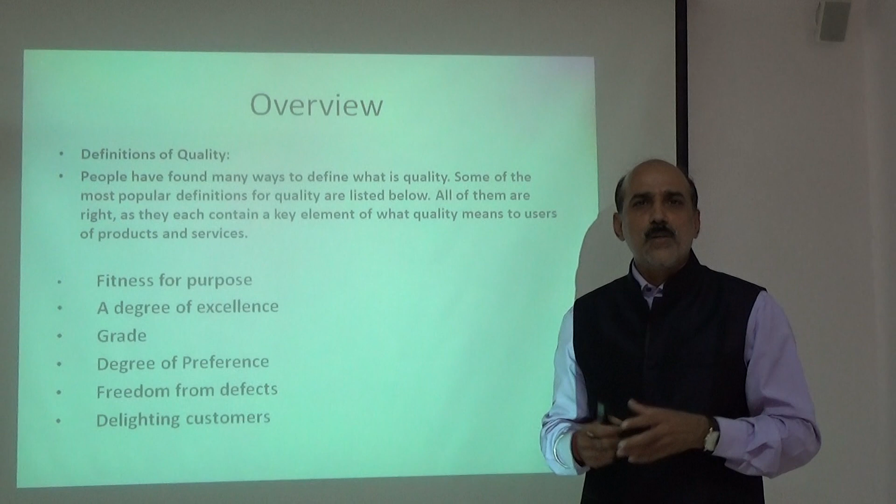If you talk about the reliability of the product, how reliable your product is - as per the definition of reliability, the product should perform its function well without failure. That shows the reliability. If the product confirms this, yes, that product has good quality.

If we talk about the degree of preferences, on the same line as degree of excellence, it is a competitive age. If you want to purchase any one product, there are hundreds of different alternatives available in the market. So it is your choice how you are preferring, how the customers are preferring the product. A simple example related to the automobile sector.

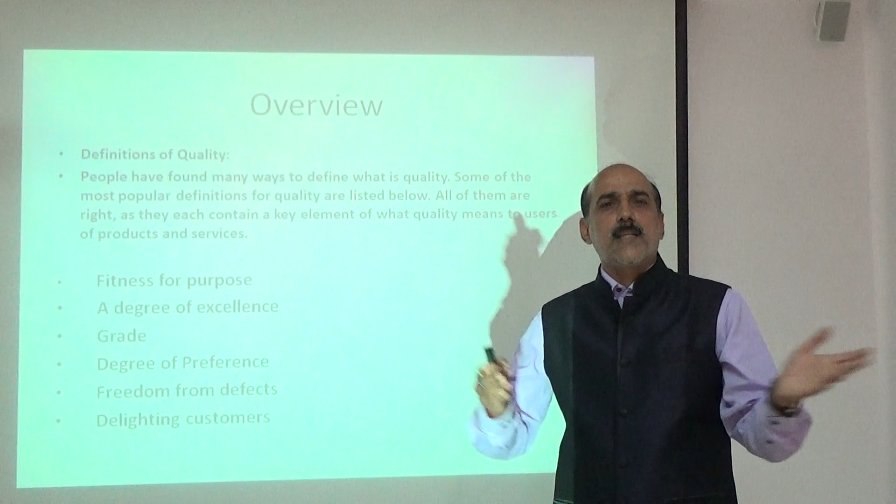Maruti Suzuki is one brand, Hyundai is another brand. In one particular segment, the cost is around 5 lakh rupees. You have multiple choices - either go for the Maruti Suzuki or go for the Hyundai i10, something like that. So it's how you are preferring the product as compared to the products available in the market.

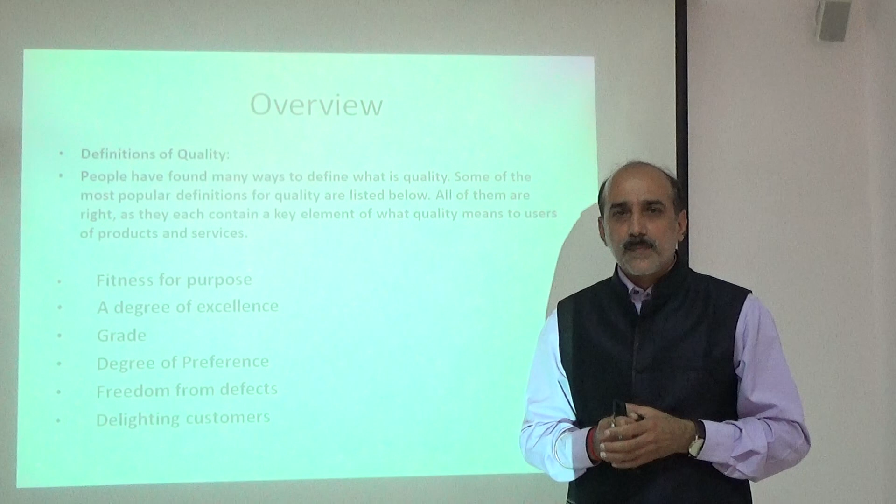If we talk about freedom from defects, that is the simple concept of quality control - 100% productivity, 100% quality product means 0% defect in the product. If the manufacturer ensures that the product is 0% defective, then you can say it is a good quality product. Another one is delighting customers.

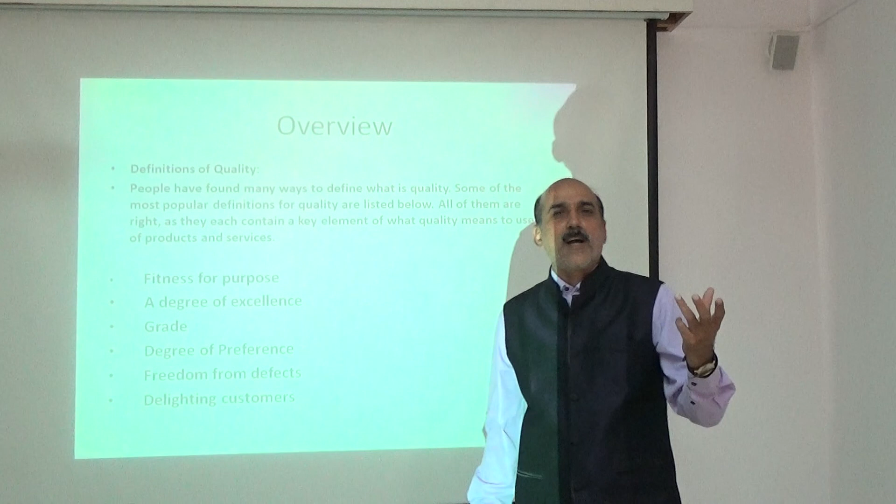The ultimate aim of any production organization, whether manufacturing products or providing services, is toward customer satisfaction. And you know, dil mange more - customers are never satisfied, my dear friends. So it is a bigger challenge to organizations and industries to give satisfaction to the customer. Up to what level will you satisfy the customer?

It totally depends on the cost of the quality - that is another concept being evolved. At the cost of what? A simple example: how are you ensuring that you are manufacturing good quality products? For that you first have to see the quality characteristics. There are lakhs of components being manufactured by thousands of different industries, and every product has been made for a specific application.

I have this simple pen and everybody is using it. As per the first definition, fitness for purpose, what is the purpose of this pen? To write on paper. If I am unable to write on paper using this simple product, then it is not a product, it is like scrap, it is wastage. Even if the body is made of gold with a diamond tip, if the basic functionality is missing, then it is not a product, if it is not fit for the purpose it is meant for.

So friends, we have to understand so many definitions. First we have to see what quality characteristics are expected by the product from the customers.

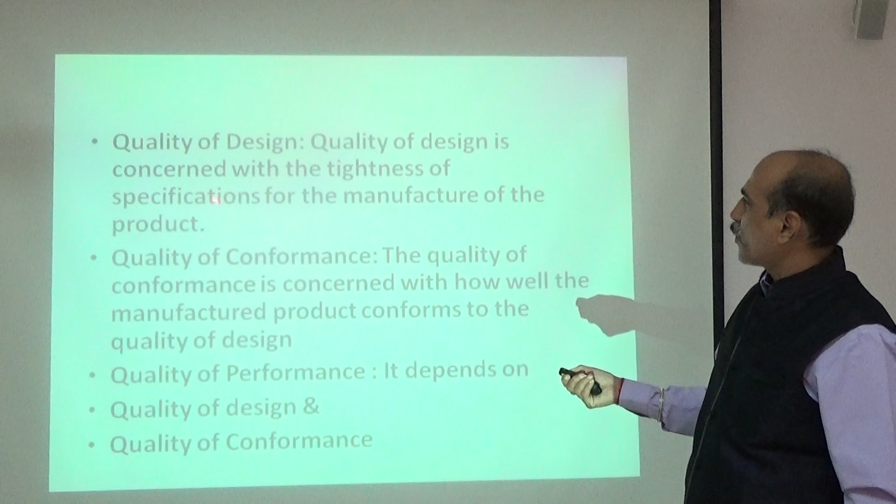On the same line, the first point is quality of design. Quality of design means it is related to the tightness of specifications. Quality of design is concerned with the tightness of specification for the manufacture of the product, and it is associated with cost.

A simple example, from a mechanical engineering point of view, we are manufacturing a gear. The specific use of that gear is extraction of juice from sugar cane. If the purpose is to extract juice from sugar cane, we are not expecting good tightness of tolerances. But the same gear can be used in the gearbox of an automobile, where the expectations are different. There we look for tightness of specification in terms of plus minus 0.005 mm.

So friends, this is what quality of design means. Looking for the tightness of specification, degree of excellence, degree of preference you have to achieve, you have to focus on quality of design, and it is associated with the cost of the component. Second is quality of conformance.

It is how the manufacturer conforms to the quality of design. Quality of conformance is concerned with how well the manufactured product conforms to the quality of design. So these two points, quality of design and quality of conformance, play a crucial role in quality control. I would like to share one more thing about this.

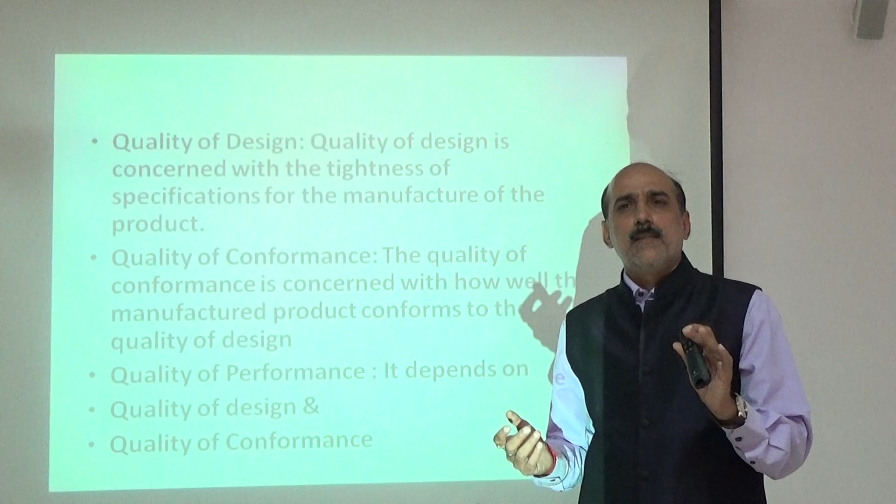What are the quality characteristics? There are some physical quality characteristics, measurable in terms of mm, dimensions, some measurable units. I can weigh this particular pointer in terms of weight. And if we can manufacture this pointer having a very light weight, we can say it is having good quality.

Because I have to keep it in my hand for more than 1 or 2 hours, it should be easy to operate. That's why the design of this pointer is ergonomically designed, so the operator can feel comfortable holding this product. This is a very simple example that I would like to put here.

Some quality characteristics are measurable using mechanical measuring instruments and gauges. But some quality characteristics are not measurable by means of mechanical measuring instruments and gauges.

I just asked you one question: how do you say the quality of half a cup of tea? How can you measure that? There is no exact measuring instrument or gauge to measure the quality of half a cup of tea. How can you say the quality of food? Again, there is no measuring instrument or gauge to measure that quality characteristic, but it is equally important.

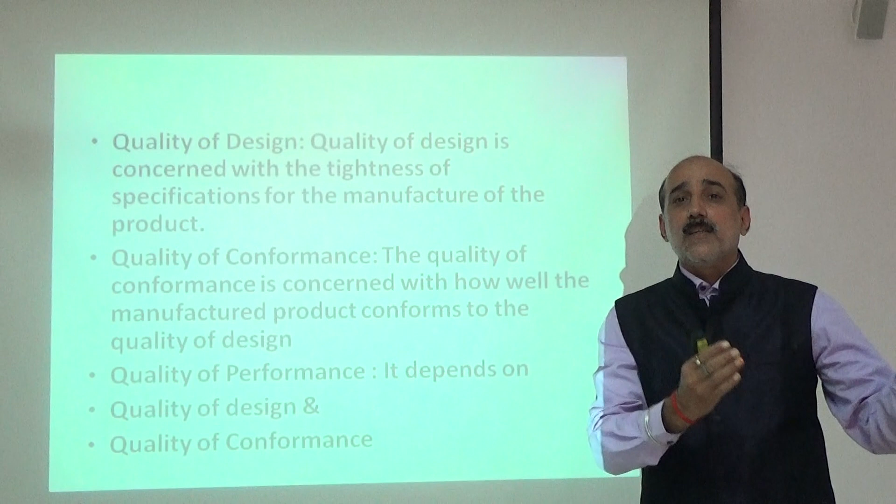If we talk about not only products, we have to consider services also. Because quality control plays the most important role, not only in manufacturing the product, but right from purchase of raw material to dispatch of the finished product to customers, before production and after production. Some quality characteristics are measurable, some are not measurable, that is clear to you.

Next, if we talk about the service industry, this is a simple example from the teaching industry. How can you measure the quality of students in terms of numbers, in terms of grades? But what about the attitude, what about the communication skill, how can you measure this?

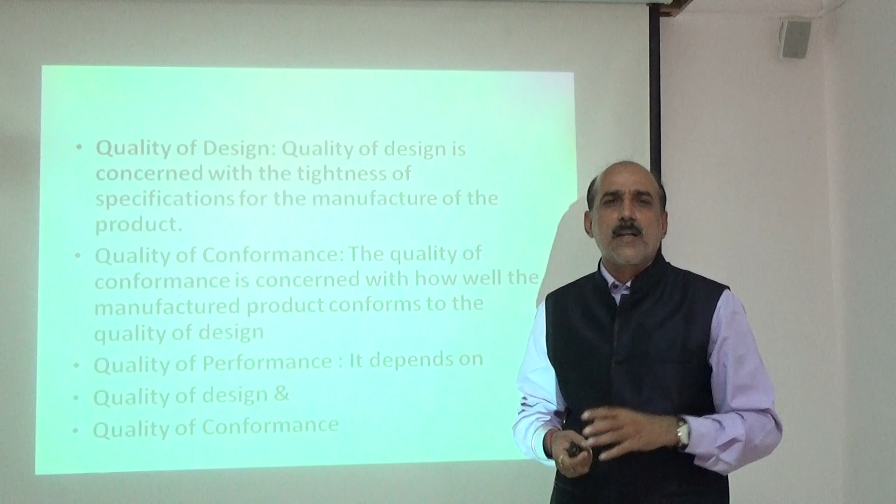On the same line, if you talk about the service sector like the banking sector, how can you measure the quality or grade the quality of nationalized banks, public sector and private sector banking? How can you measure the quality of hospitals, the quality of restaurants, how can you compare the service provided by airlines, like comparing Jet Airways with Air India?

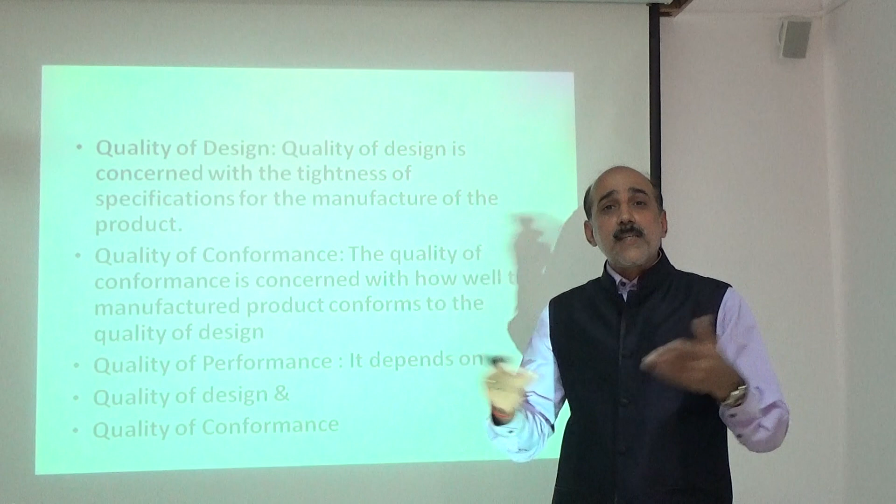So my dear friends, it is a very complex phenomenon to understand quality, and there is always some variation. I assume you understand what exactly quality is, but there are hundreds of different definitions of quality.

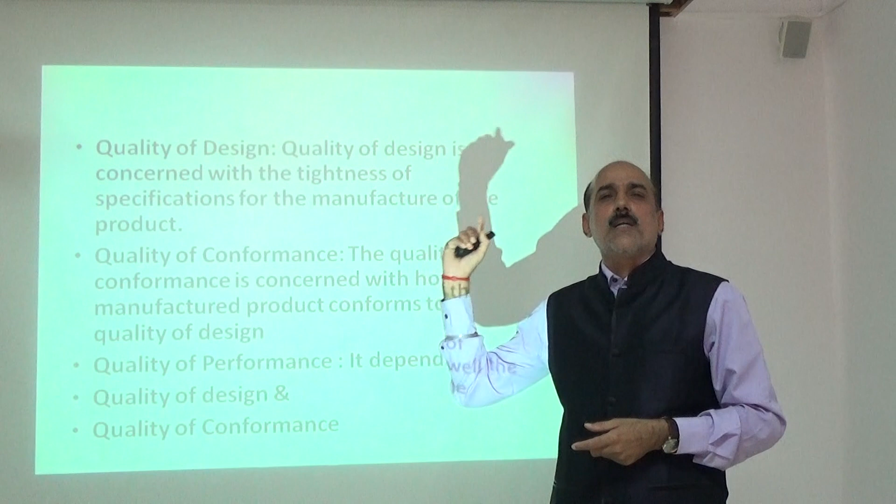Even we are trying to define it with the help of a few words that I already quoted in the earlier slide. We talk about quality of design, tightness of specification, quality of conformance in terms of how you are conforming to the quality of design, and the most important factor, quality of performance, which depends on the earlier two.

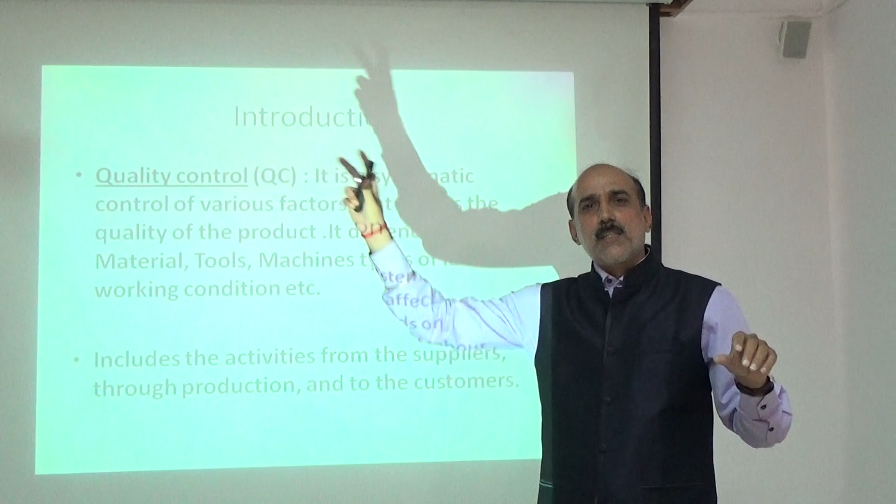If we talk about control, as you know, there are two words in quality control. One is quality - we understand what that is. Second is control - what is meant by the term control? How will you make good quality components and maintain control on all the parameters in the organization, whether it's a production industry or a service industry.

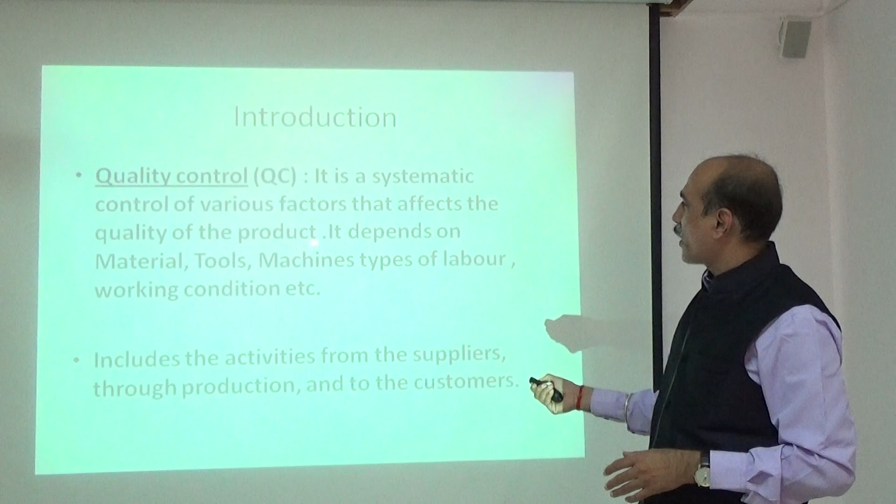Quality control means what? It is a systematic control of various factors that affect the quality of the product. It is self-explanatory - a systematic control of various factors affecting product quality. It depends on material, tools, machine, types of labor, working conditions, etc. There are n number of parameters affecting the quality of the product.

To make good quality products, quality control plays a crucial role. There is one separate department called the quality control department in any organization, but it is not only the responsibility of that particular department to look after quality. It starts from the suppliers.

As you know, a simple example from a mechanical engineering point of view - Maruti Suzuki does not manufacture tires. These are sub-assemblies that you require. The engine may be very nice, its performance excellent, but the overall performance of that particular four-wheeler, the automobile, also depends on the sub-assembly supplied by other manufacturers.

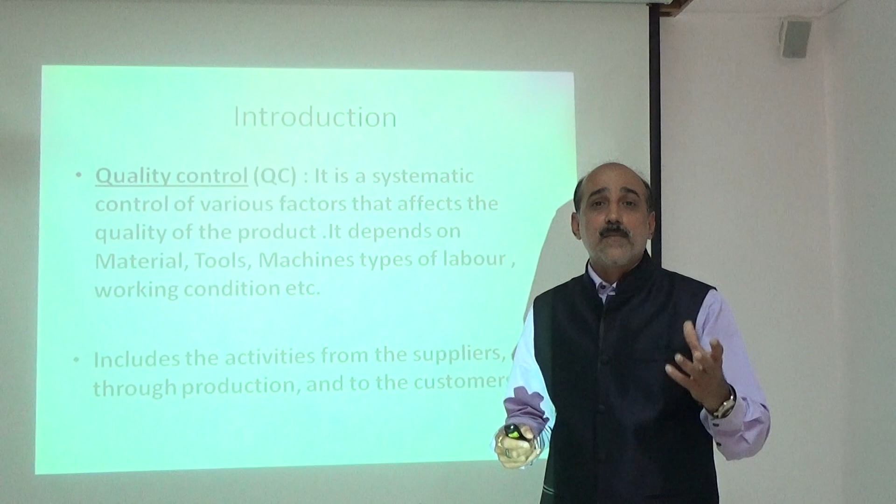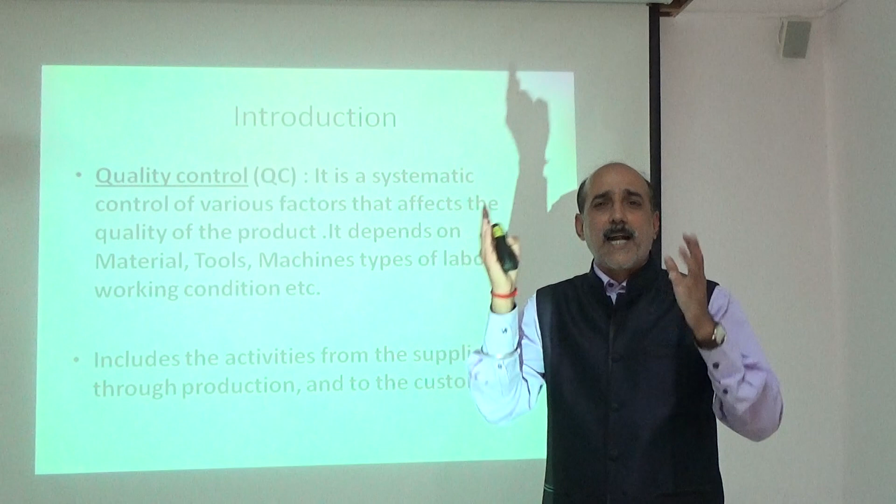So everybody is responsible right from the material. You have a good CNC machine, but what about the quality of the raw material you are using? So quality of material, quality of the machine tools you use, the operator, the mentality of the operator, his attitude, and his tendencies in performing on that particular machine - there are n number of parameters affecting the quality of products.

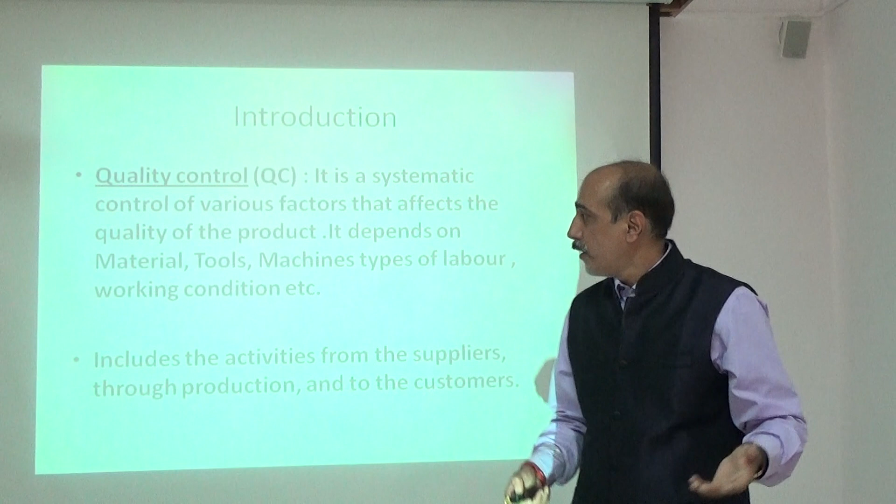So I try to define the term quality control. Again, there are many ways to define the term. It is a dedicated department in the organization to look after quality control, and it includes activities from the suppliers throughout production and on to the customers.

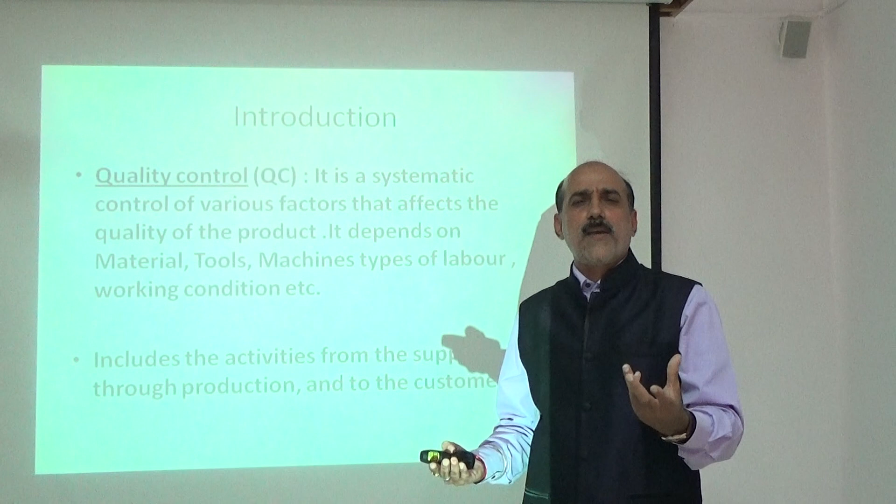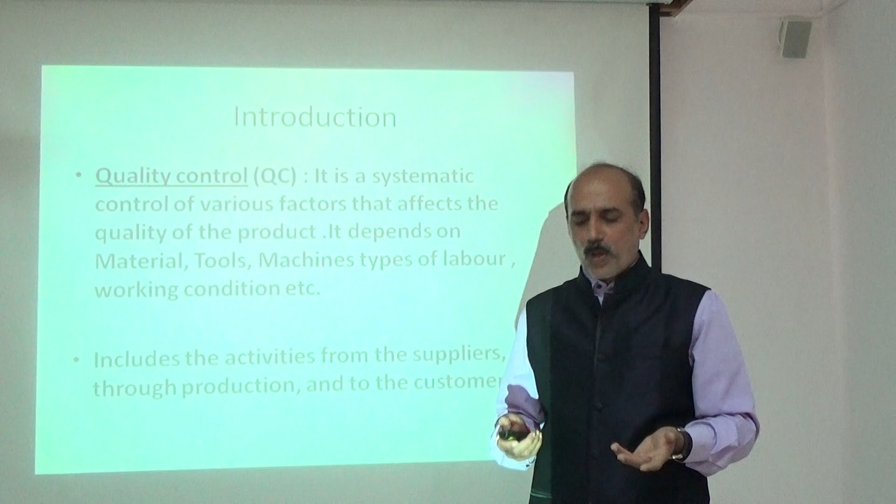The role of any organization is not only to produce quality components. You've heard the term sales and after-sales service that we avail of. The manufacturer is worried about the performance of the product even after selling it, which is why they give a warranty for 1 year or 3 years depending on the product and the requirement.

If you talk about the entire structure of the quality control department from a manufacturing and production industry point of view, it is self-explanatory - quality control throughout the production system, inputs. For manufacturing one physical commodity, you need input - input in terms of material, input in terms of labor, input in terms of machines, meaning n number of inputs that you require.

And these n number of inputs are being converted into the output. Our main role is that we have raw material input, which is supplied and required for the assembly of the final product.

How you are converting all these inputs into the finished product, that is your final product that you are selling in the market - that is what makes the production process very important. As you know, from a manufacturing or mechanical engineering point of view, there are different types of manufacturing processes: casting, forming, joining, assembly, machining. So you have to select the best one.

A simple example: gears are being manufactured by casting also, and gears are being manufactured by machining also. So we have to see which process is best for our end product. Production processes play the most important role in converting the input into output - the output being the products and services, as I have already told you earlier.

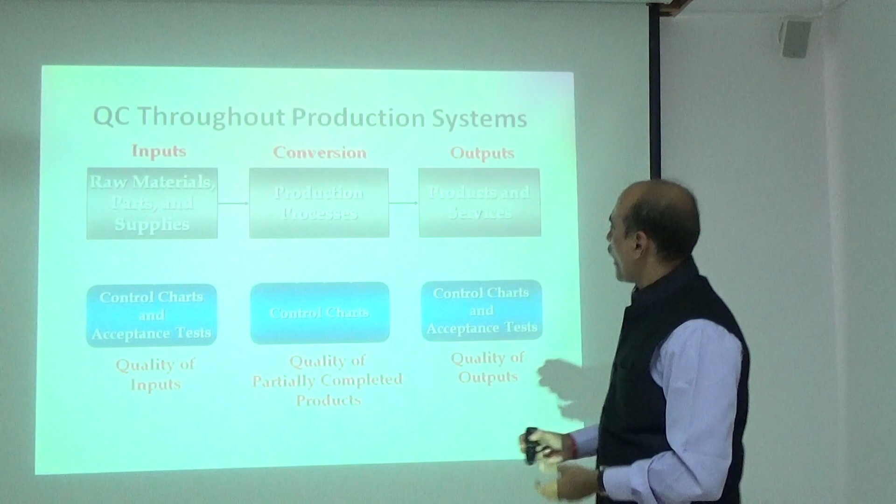My dear friends, you know there are no two things identical in the world. There is always variability. If time permits, I will give a demonstration. You write your name twice - just like my name is Himte. If I write 'Himte' with the same pen, same paper, I still won't be able to write the same alphabet H twice. There is always variability. You can take this as an assignment - experience it yourself and you will find there is always variability.

What is the reason for this variability? The simple thing is variability is always there, but up to what extent will you accept it? If we talk about font size 12, the variability to 24 font size will not be acceptable - it should be 12 point plus minus 0.1, something like that. So there is always a permissible limit. We understand there is always variability, but up to what extent?

That's why we know about control charts. In another lecture I will talk about control charts in detail. These control charts show you a graphical representation of the collected information on whether the process is in control or not. If the process is going out of control, you have to take measures.

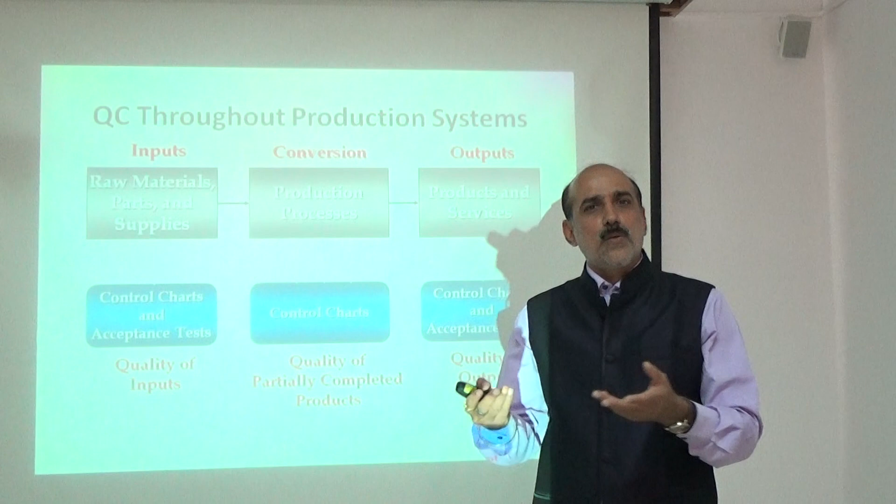As per quality, we just compare it with the standards. You know what is meant by a standard? 10 mm is equal to what? 1 centimeter - that is a standard, a universally accepted standard. 10 mm equals 1 centimeter in India, and also in China and in European countries.

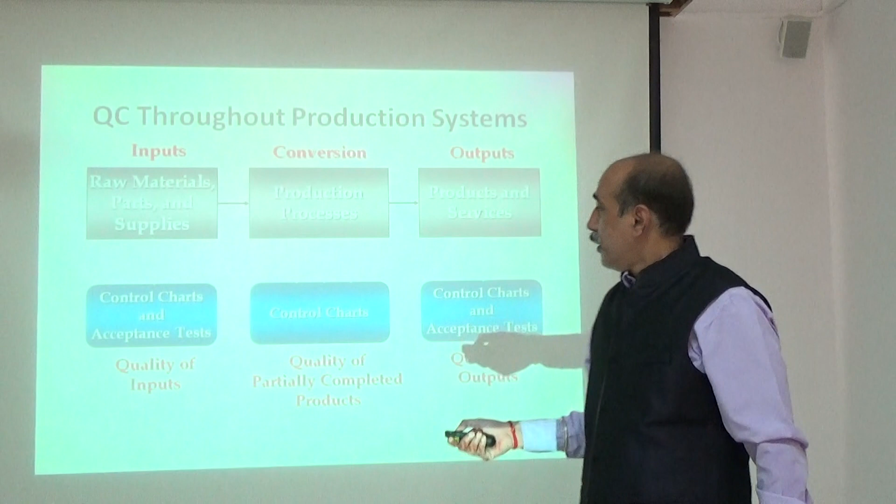If we talk about control charts for quality of partially completed products - take the simple example of the productivity of a Mahindra and Mahindra plant located in Nagpur, manufacturing tractors. We talk about the entire productivity of that plant. We have to see each and every machine's productivity, each and every operator's productivity, and cumulatively calculate the overall plant's productivity. Everybody is responsible for the quality product, as I have told you many times.

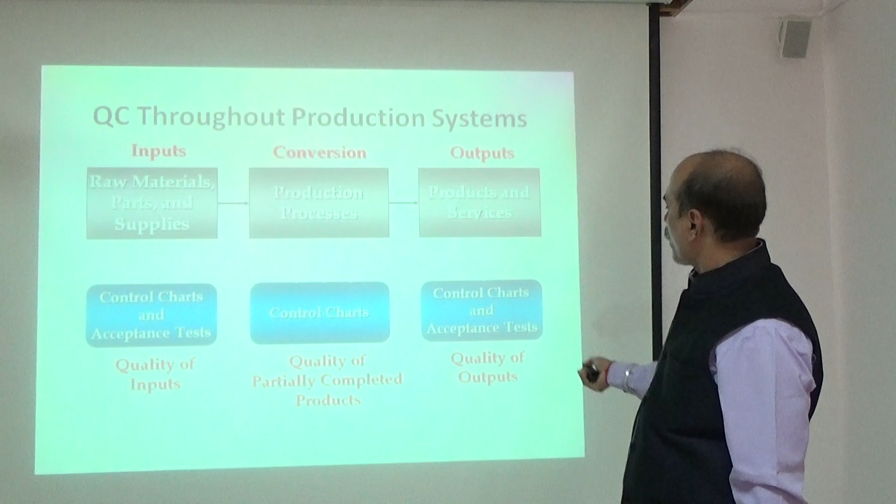Second, control charts and acceptance tests for the quality of outputs. Whatever outputs are being generated, whatever products are available, whatever services are being provided, you have to check the quality of the product.

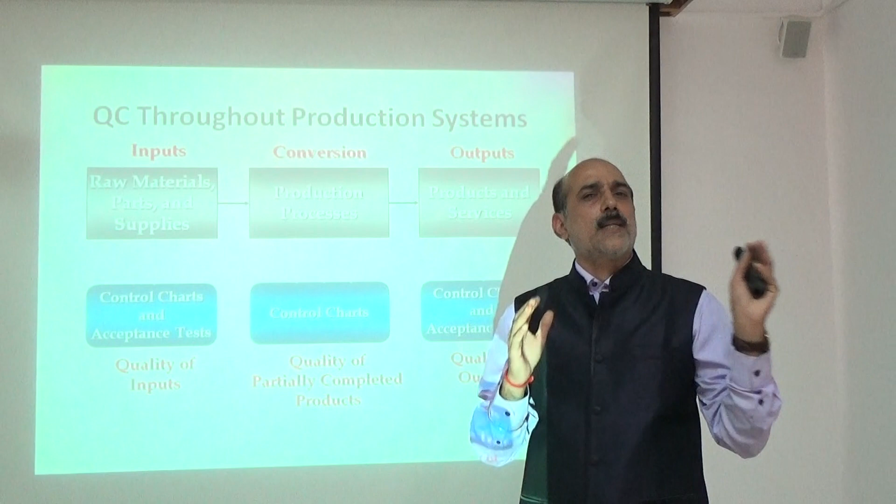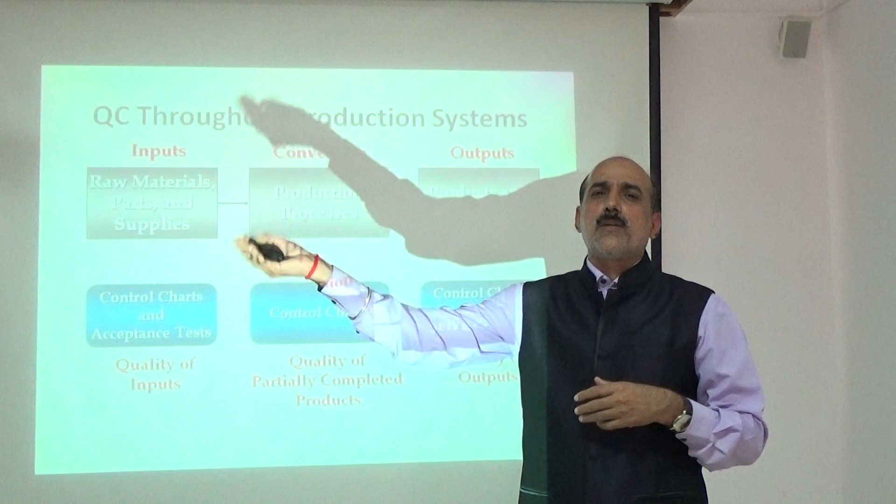One thing is clear: how you can check whether the component you are manufacturing is up to the quality mark or not. If there is a deviation, you have to go for inspection. But inspection is totally different than quality control. Inspection means just checking the dimensions. In quality control, we check the dimensions, and if they are not within the limit, you have to take corrective measures. That is the difference between inspection and quality control.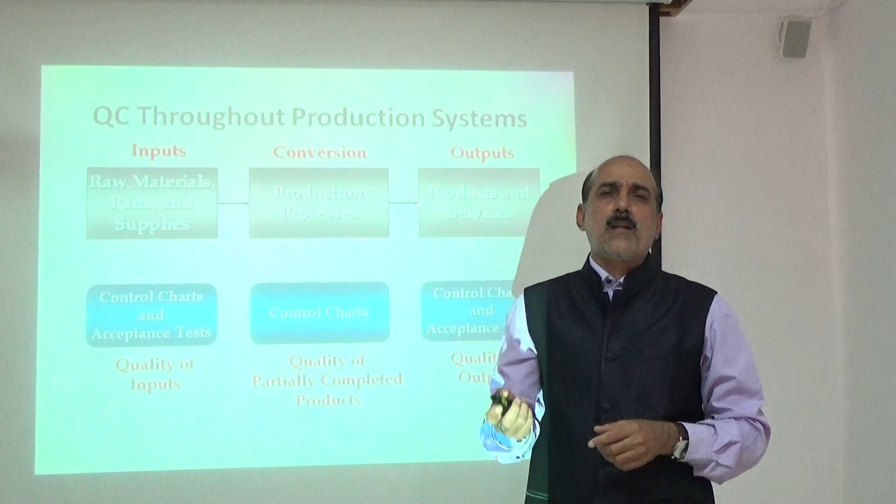So in the entire organization, right from the last person to the top hierarchy of management, everybody is responsible for the quality of service and quality of the product.

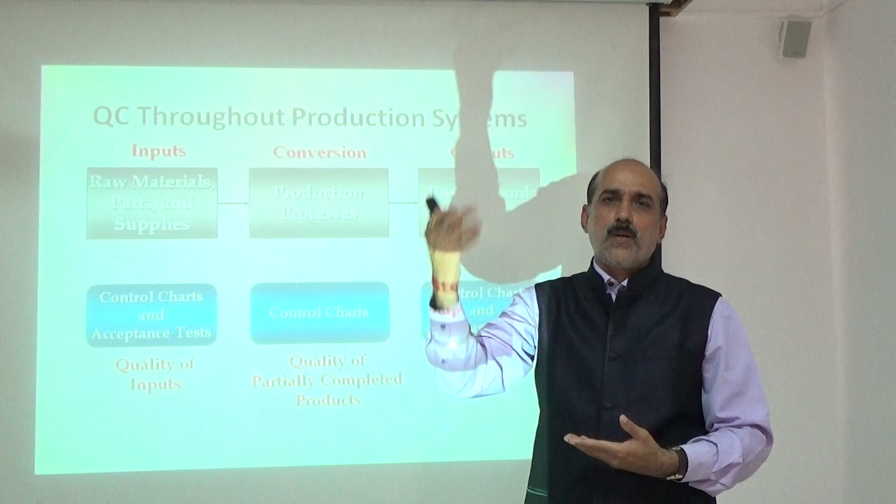If we talk about this simple example, that is the product and their customer expectations. I already told you, customers are never satisfied. They always want something new, something unique, something special from the product. You know the 'dil mange more' slogan - that is the customer mindset. At what cost, and up to what extent are you trying to satisfy the customers? That is a bigger challenge in this competitive world.

So I am quoting this simple example from mechanical engineering. But one thing is clear: quality control is not only restricted to mechanical engineering. There are so many good concepts and quality improvement techniques you can implement in yourself, and you will see how drastically your personality changes. That is also a part of quality control.

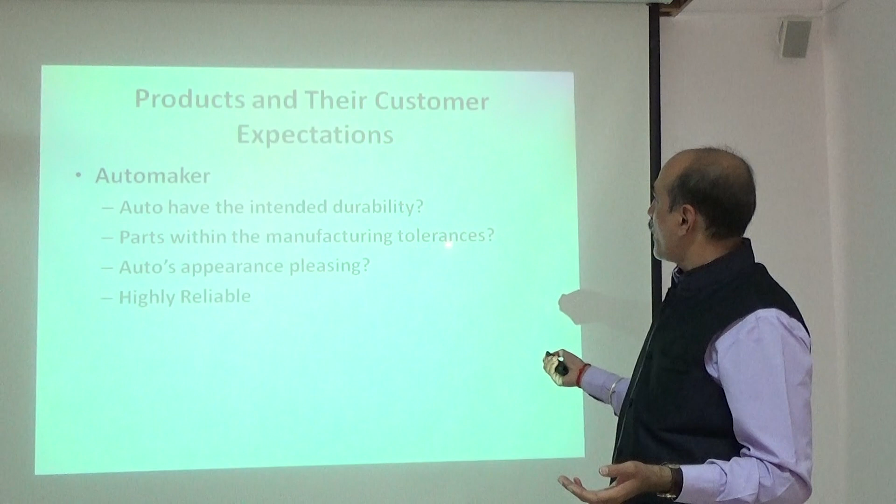Second, a simple example from mechanical engineering is the automobile. Autos have intended durability - whatever components or products you manufacture should be durable. Parts within the manufacturing tolerances, the sub-assemblies like IC engines, clutches, gear, tire, tubes, everything, and then you come to the final assembly. The quality of that particular product depends on the various small sub-assemblies.

Then autos have pleasing appearance. Take the example of sports bikes - you know the shape, the appearance, that is called the aesthetic aspect of the product. This aesthetic relates to the aerodynamic shape of any four-wheeler. See the shape of the Swift Dzire, the shape of the Mercedes, the shape of the BMW - there are different segments available in the market. I am giving this simple example from the automobile industry.

The cost of one four-wheeler available in the market ranges from 3 lakhs - I am not naming the manufacturer - to 10 crores. These are different segments available in the market just to move from one place to another. I am working in PID, living in Wardha Road, and I just want to move 12 kilometers. I will have around 100 different options to buy a four-wheeler. The cost ranges from 3 lakhs to 10 crores, depending on the customer's expectations and financial condition.

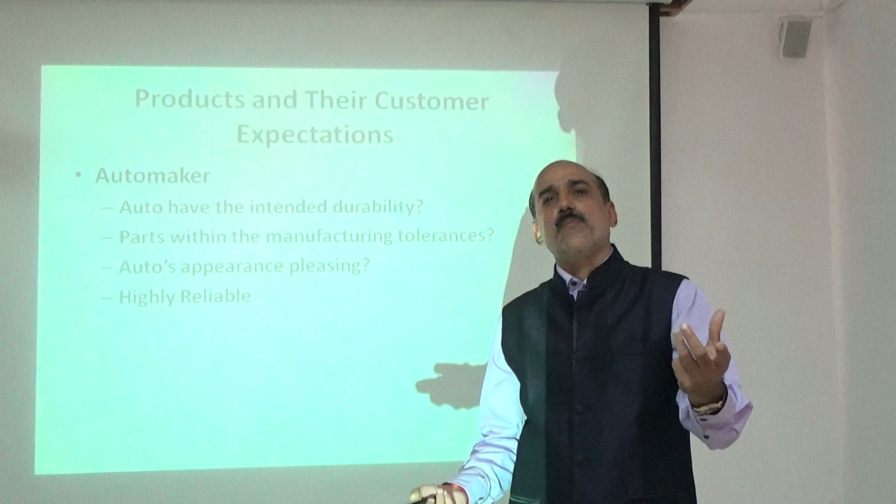Second is high reliability. Do you know the definition of reliability? The product or equipment should perform its function well without failure. So, how can you make your product more reliable so that you can build a brand - whether it is a production industry or a service industry?

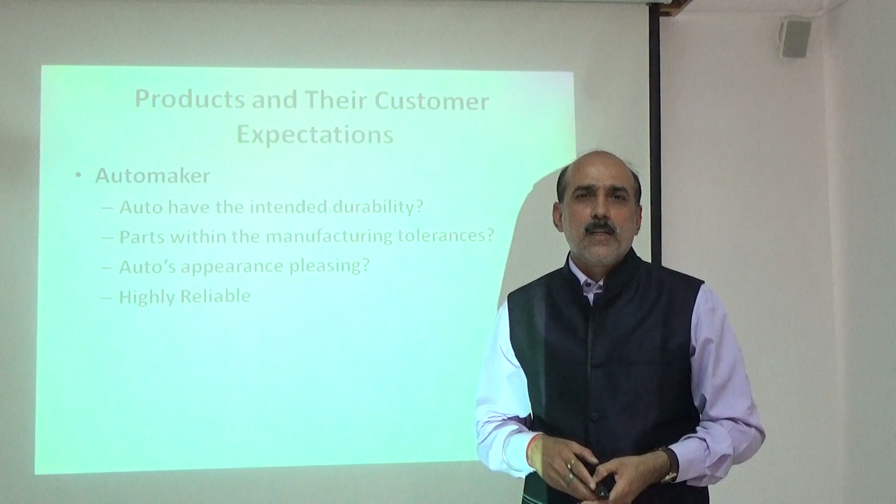In the next lecture we will talk about statistical quality control. As you now understand what is meant by quality and quality control, there are different tools to improve the quality of the product. Thank you very much.